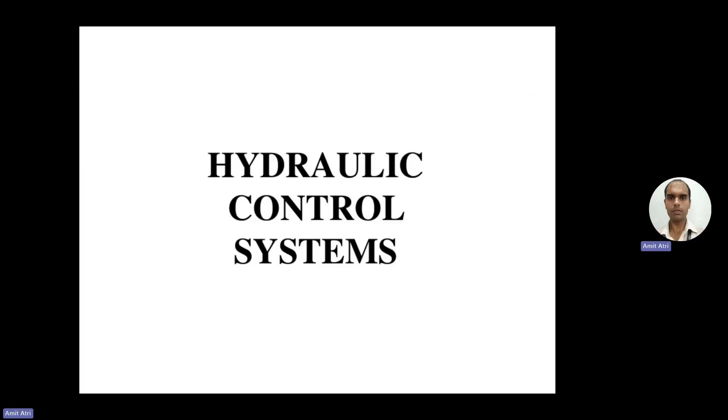So today we will discuss the next topic after the pneumatic control, that is hydraulic control system. So the controlled movement of parts or a controlled application of force is a common requirement in the industries. So these operations are performed mainly by using electrical machines or diesel, petrol, steam engines as a prime mover. The enclosed fluid, that could be liquid and gases, can also be used as prime mover to provide controlled motion and force to the objects or substances.

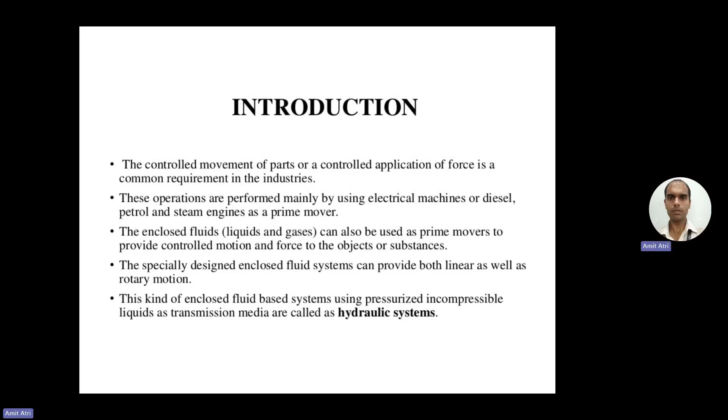So specially designed enclosed fluid system can provide both linear as well as rotary motion. So in this system, we are discussing about the movement of fluid. That is the difference between a pneumatic system which uses air. Here, hydraulic system uses fluid. So this kind of enclosed fluid-based system using pressurized incompressible liquid as transmission media are called as hydraulic systems.

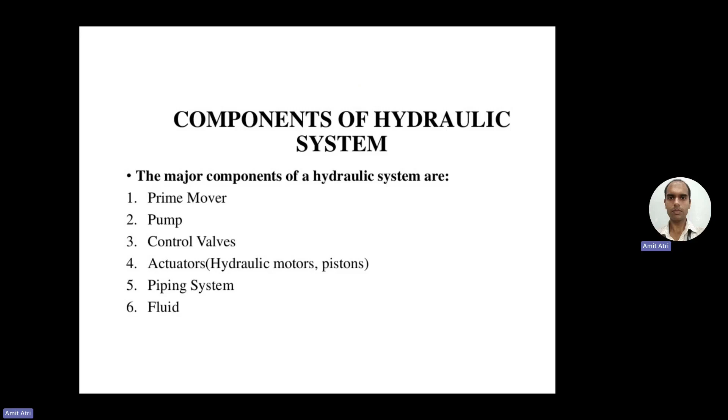So the components of hydraulic system: first one, prime mover; second, pump; third, control valve; fourth, actuator, so that could be hydraulic motors or pistons; fifth, piping system; and sixth, a fluid. So next is the components of a hydraulic system. So the supporting components include, first one is filters, second strainers, third storage tanks, fourth heat exchanger, five pressure gauge, six sensors, seven protective devices, eight control devices, nine accumulators.

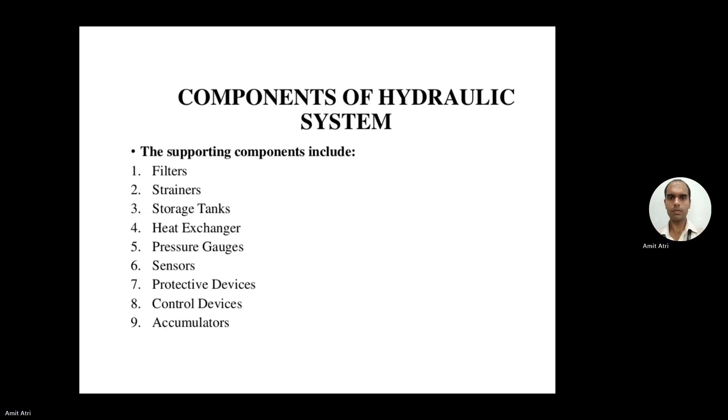So discussing these topics one by one. So first one is the prime mover. So prime mover is a device which develops the mechanical power. So this power in a hydraulic system is basically used to drive the pump. So prime mover includes internal combustion engine or turbine, or some other similar type of equipments or the devices.

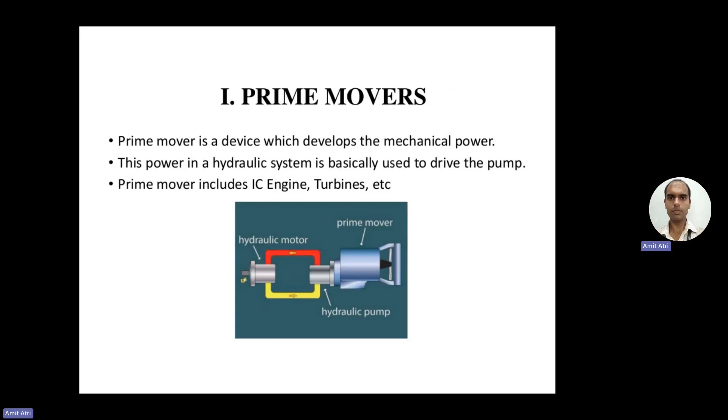Next is hydraulic pumps. So pump is a device which converts mechanical energy to fluid energy. So hydraulic pump takes hydraulic fluid, mostly some oil, from the storage tank and delivers it to the rest of the hydraulic circuit. So the hydraulic pumps are characterized by its flow rate capacity, power consumption, drive speed, pressure delivered at the outlet, and efficiency of the pump.

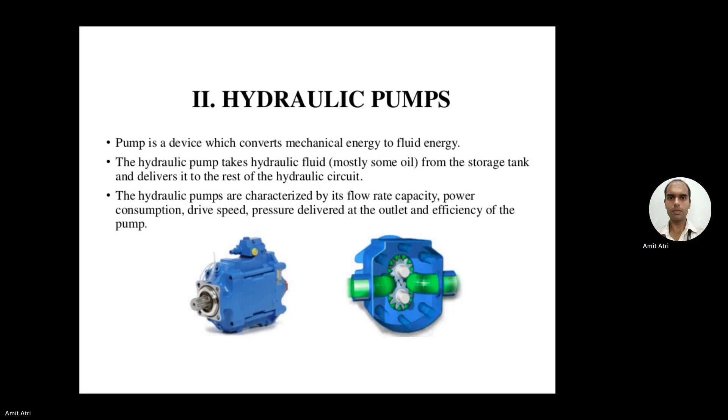Then next is the control valves. So the control of mechanical outputs, so motion and force, is one of the most important functions in a hydraulic system. The proper selection of control selection ensures the desired output and safe functioning of the system. So in order to control the hydraulic outputs, different type of control valves are required. So they are like directional flow valves, directional control valves, then flow control valves, then pressure control valves.

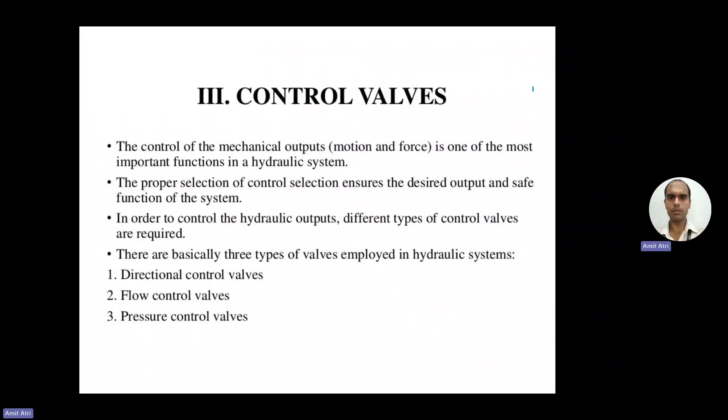Now next is hydraulic actuators. So hydraulic actuators employ hydraulic pressure to drive an output member. So these are used where high speed and large forces are required. The fluid used in hydraulic actuator is highly incompressible. So they convert high power fluid into mechanical power. Okay, so fluid power into mechanical power.

So depending on motion, they can be classified as linear actuator and rotary actuator. So linear motion and output is obtained from linear actuators. So that could be like cylinder or piston. Then in the case of rotary actuator, we obtain a rotary motion that is similar to a motor.

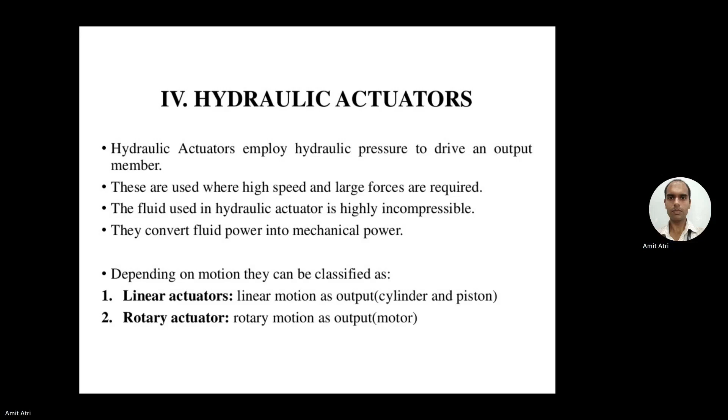Next is the hydraulic fluid. So hydraulic fluid must be essentially non-compressible to be able to transmit power instantaneously from one part of the system to another. At the same time, it should lubricate the moving parts to reduce friction loss and cool the components so that the heat generated does not lead to fire hazards. So the most common liquid used in hydraulic system is petroleum oil because it is only very slightly compressible. So properties of hydraulic fluids like non-compressible, then low volatility, corrosion control, fire resistance, low toxicity, and good lubricator.

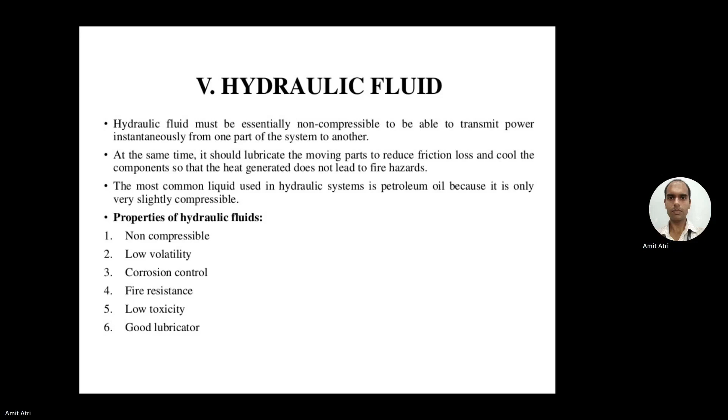Next is filters. So the hydraulic fluid is kept clean in the system with the help of filters and strainers. So it removes minute particles from the fluid which can cause blocking of the orifice of the servo valves or cause jamming of spools. Then types of hydraulic filters. Suction filter. The suction filter provides protection to the hydraulic pump from particles larger than 10 micron.

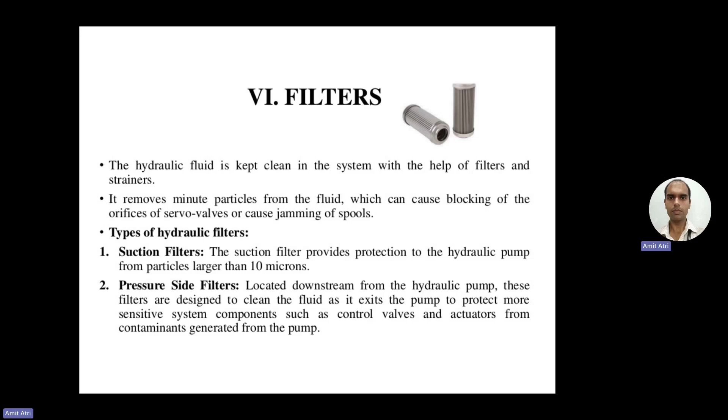Then pressure side filters. So they are located downstream from the hydraulic pump. So these filters are designed to clean the fluid as it exits the pump and protect more sensitive system components such as control valves and actuators from contaminants generating from the pump.

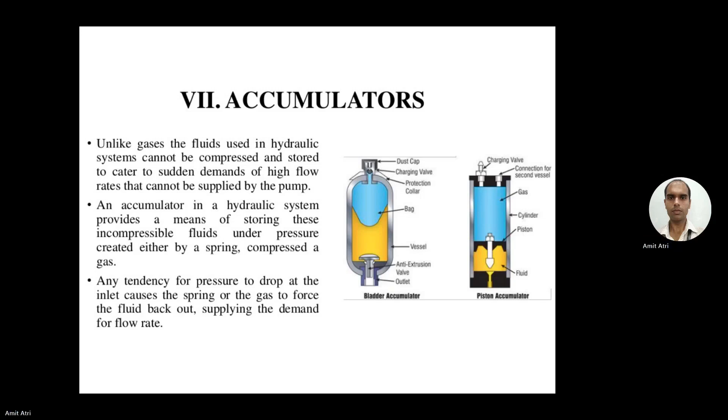Now the applications of hydraulic systems. So first one is industrial. So the plastic processing machinery, steel making, primary metal extraction applications, automated production lines, machine tool industries, paper industries, loaders, crushers, textile machineries, R&D equipment and robotic systems.

Next is mobile hydraulics. So tractions, irrigation system, earth moving equipment, material handling equipment, commercial vehicles, tunnel boring equipment, rail equipment, building and construction machineries, and drilling rigs. Next is automobiles. So it is used in systems like brakes, shock absorbers, steering system, windshield lift and cleaning, etc. Then marine application. So it mostly covers ocean-going vessels, fishing boats, and naval equipments.

Then last is the aerospace equipment. So there are components and systems used for rudder control, landing gear, brakes, flight control and transmission, which are used in airplanes, rockets and spaceships.